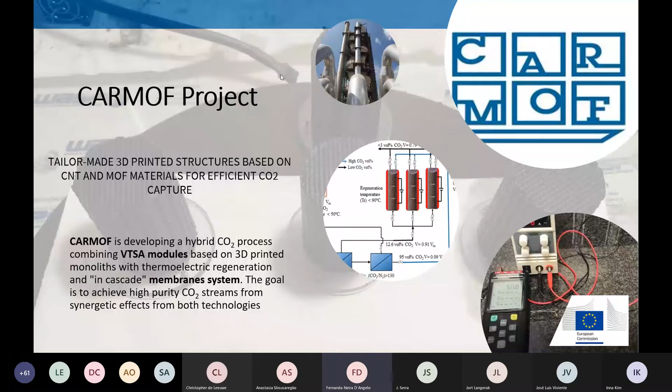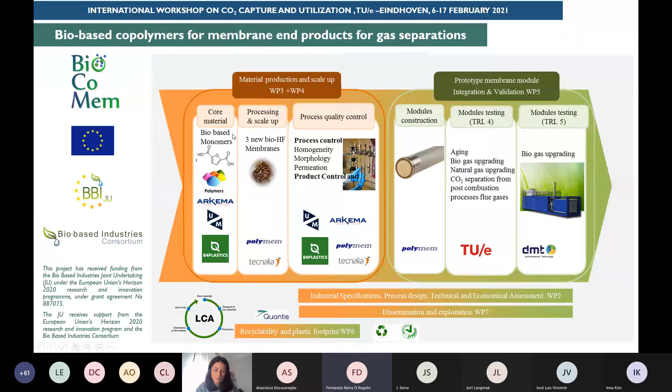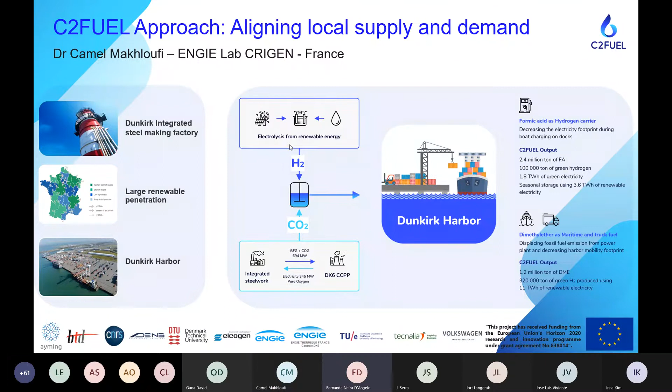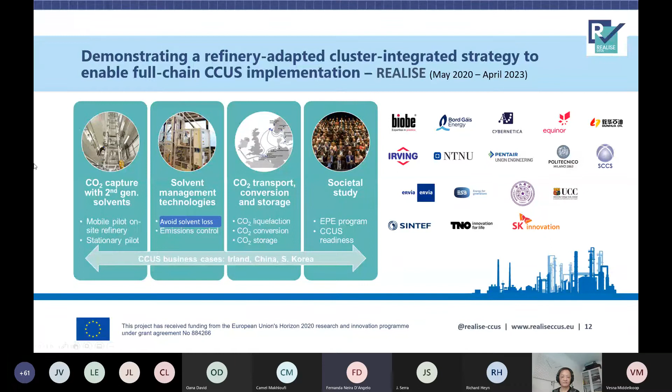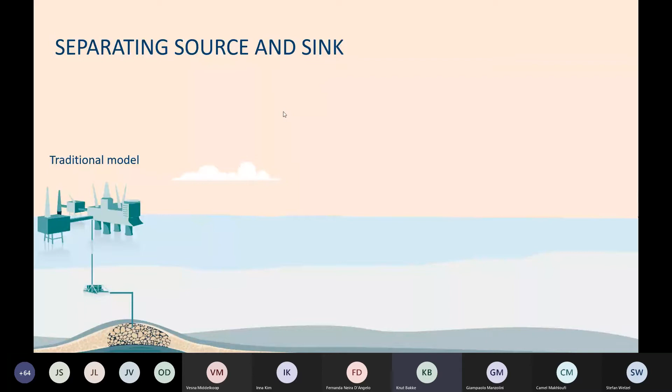So what we aim to do is to take the complexity away from the industrial sources by offering a service of collecting CO2, transporting it, and storing it in an underground reservoir for permanent storage. So the idea behind this is that oil and energy companies are competent and familiar with geology and the offshore work, while the industrial emitters can then focus on running their industry and learning how to capture CO2 from their particular industries.

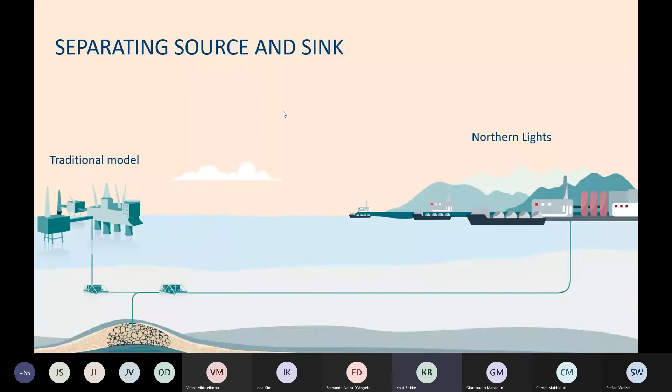So we are part of something that was named by the Norwegian government as a longship, which is a direct translation from the ships that were used by the old Vikings when they traveled around Europe. So it's intended to be a start point for an industry where we have a value chain with CO2 capture. We had in the initial stages two industrial emitters, one from a cement factory and one from a waste incineration facility in Oslo.

And we have a transport piece, which for us is in liquid pressurized form in ships. That has to do with the distance between the point source and the storage facility. So in the future, there may be other solutions with pipeline-based networks as well, and we don't really see that as a competition. We see all CCS as complementary at the moment.

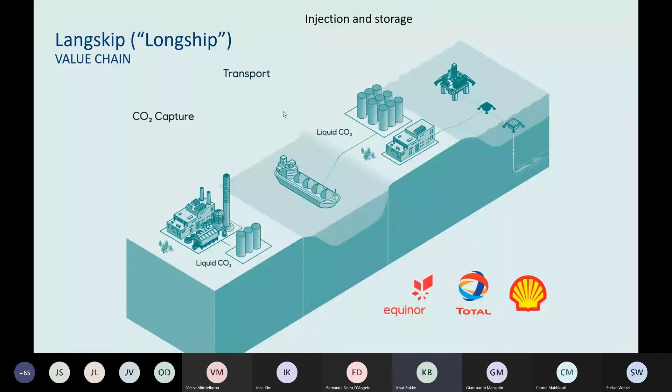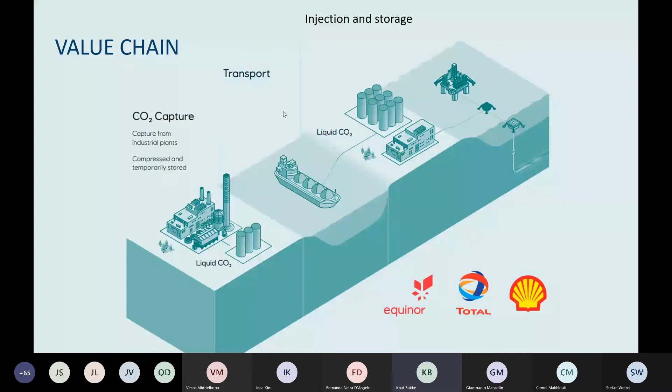So this is the concept where we basically capture CO2 from industrial plants. We compress and temporarily store the CO2 in tanks. Our process conditions are typically 15 bar, minus 26 degrees C. We transport it into a ship, and of course the Northern Lights scope of work is what's green on the screen now: ships, an onshore facility and offshore storage.

We take the CO2 compressed and transported by ship. We receive it at an onshore facility that will be located outside of Bergen on the west coast of Norway, where we receive and temporarily store the CO2 in the tanks that you see. We export it via an offshore pipeline and inject it in the reservoir some 2,500 meters below the seabed. And as you can see, the process is a batch operation when it comes to ship offloading. It's a continuous process when it comes to injection, and therefore the need for interim storage tanks.

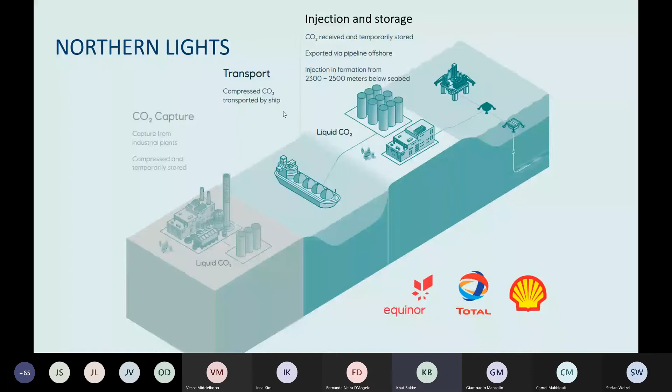The Longship project, as it stands today, has funded the Norcem facilities. And I can put up a pointer probably. Norcem facilities, it's a cement factory located here south of Oslo, which is up here. They will start up CO2 capture in 2024. There's also partial funding for the waste incinerator facility up in Oslo, but they need to attract additional funding. So the FID for this one is sort of on hold until they can attract funding.

Then we transport CO2 along a shipping route using purpose-built vessels. I'll get back to that. To the onshore facility here west of Bergen, an onshore facility being established, export into the offshore and injection to a subsea facility. So currently we're building a facility scope with capacity for 1.5 million tons per annum. We have two ships on order, and the volume from Norcem alone is 400,000 tons per annum. So by deduction, you can see that we're looking for more customers. More on that later.

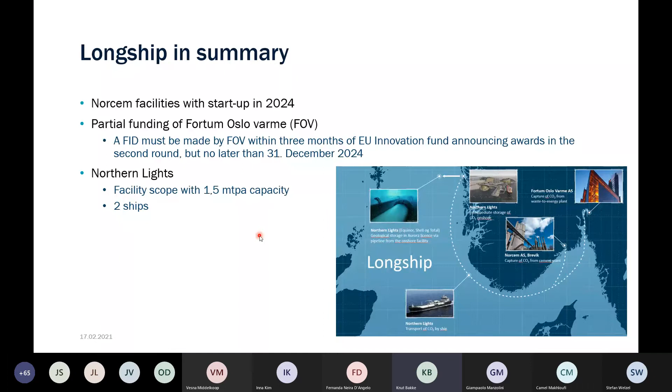The CO2 capture at the Norcem facility is illustrated here. They aim to collect 400,000 tons per year, which is about 50% of their CO2 emission. The reason they're not capturing all is one of heat surplus. 50% can be captured using surplus heat in the process. So that's what they're aiming for.

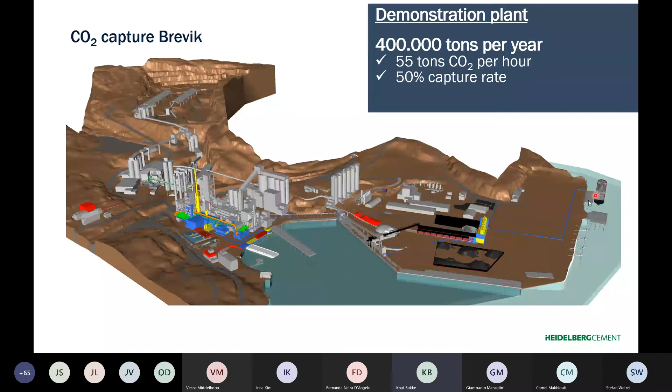What you're looking at here, all the gray stuff is the existing cement factory. All the colored stuff is new scope, with the capture facility here, delivered by Aker Carbon Capture. The blue are new buildings, and the CO2 will be captured and exported through to the storage tanks here, and finally offloaded at a commercial harbor called Grenlandhavn, where our ships will arrive and collect CO2 in the operations phase.

So what is Northern Lights? I'll get into a bit more detail about what we are doing. First and foremost, we're looking at CO2 transport by ship. That is an existing trade today, with food grade CO2 being exported by ships to breweries and greenhouses, etc., around Europe. One of the sources is the fertilizer factory owned and operated by Yara, not too far from Norcem. And that's sort of the starting point for our transport conditions. They typically transport in these conditions on smaller ships. So our step out is the size of the shipping.

And we have basically taken a relatively standard LPG ship that we are familiar with in the oil and gas industry. The idea of using a standard ship is to not pay a lot of money for developing something brand new, but rather take off-the-shelf designs and modify. So we have a proven concept based on this food industry model. We basically developed the storage tanks in the ships, and we aim to copy-paste, buying more ships. Potentially we're going to make them a little bit bigger. It depends on the future market for transport and storage.

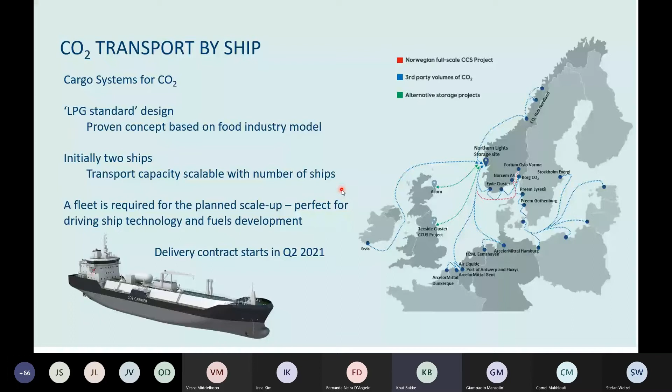The CO2 will then be loaded through pipeline into these storage tanks, and there will be a gas return in the system. So when we move CO2 here, the vapor space on top of these tanks will be moved back into the ship. So there's essentially a zero emission concept.

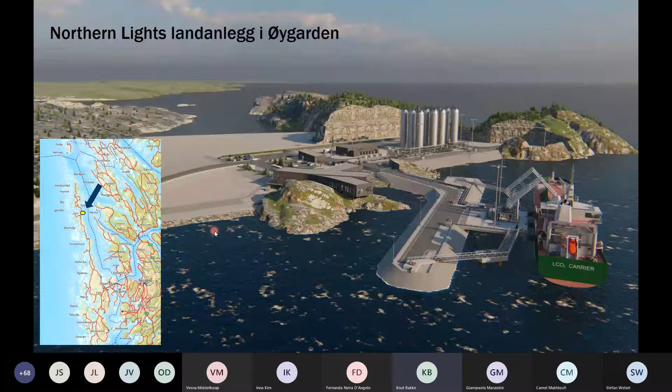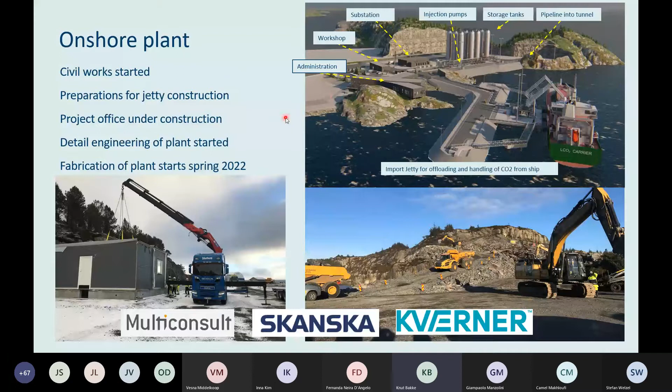Pipeline and subsea facilities, we already installed this template that you're looking at here in 2019 when we drilled our confirmation well. You see a picture here of this yellow bit at the sea bottom with the fish and our name on it. We drilled a confirmation well in 2020 before we took final investment decision in order to prove up the storage concept in this area. I'll get back to that.

We have started fabrication of a control umbilical, power, fiber optics. We are starting with engineering and modification at what's called Oseberg, which is an oil and gas facility near to our injection well. We have decided to pull the controls back to that platform in order to save money on the umbilical and control cable cost. We have started to design the pipelay, and again, a few of our contractors you can see here.

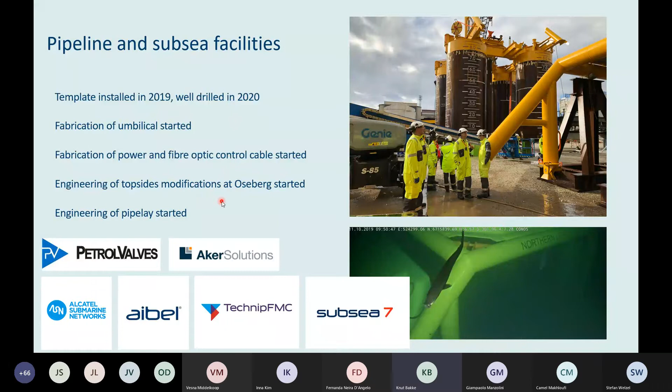Here is a rather busy illustration. It's intended to show you the location of the onshore with the pipe route going out here into the area where this well that I just talked about, it's called EOS, is located here. The offshore installation for control cable is located here. And we also are planning a contingent well in this area.

All these lines are trawling patterns from bottom trawling activity in 2018, and it shows that it's a fairly busy area. So one of our very important parts of design and installation is obviously not to conflict with fisheries. That means we need to have over-trawlable facilities, and we need to coexist with the fishing industry rather than fighting them, which is something that we obviously have been doing for a long time in the oil and gas industry.

For illustration, up here is the Troll gas field operated by Equinor with the pipelines back to Mongstad and the Kollsnes gas facility here. The Troll is both an oil and gas producer.

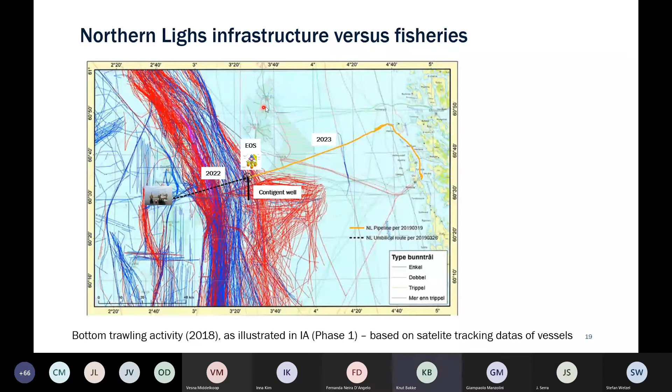Now to the storage concept. So I've tried to illustrate it. I'm not a subsurface skilled person, so this is a layman's description of the scope. But what you're looking at here is the well that we already drilled, which we will get back to later and complete for injection. And the purple part here is the expected extent of the CO2 modeled with an assumption of a certain volume injected that we have committed to in what we call phase one of this project.

And we are injecting into what we call a sloping aquifer. So these are sandstone formations with water, not to be confused with oil and gas structures. This is one without oil and gas in it, and it's only used for storage, meaning we are not looking for EOR opportunities or things of a similar nature. This is purely for addressing the climate issue.

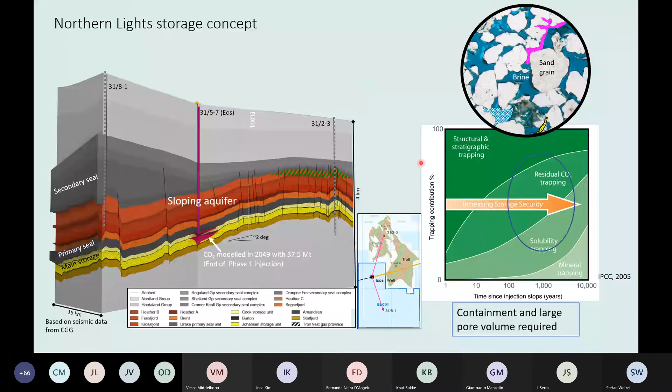So I'm going to talk a little bit about the storage experience. So this is industrial experience from Norway, meaning we are not doing this for the first time. Equinor has injected from Sleipner since 1996 and from Snøhvit from 2008. Both of those are gas-producing fields with excess CO2 that, driven by this local CO2 tax in Norway, have been commercial CCS projects in their own right. And we've stored nearly 20 million in Sleipner.

We have a publicly available data set for the storage, so we're trying to be very transparent on the storage bit there. Snøhvit has injected a bit less, but more recent, and that's a subsea facility which is similar to what we have in terms of the injection technology and the wells used up there. So it's not something new, and of course Shell and Total have experience as well, with Shell's most dominant project at the moment being the onshore Quest project in Canada.

Also partnered with Gorgon, with Chevron, on the Gorgon LNG facility in Australia. So there's quite a bit of industrial experience gained already.

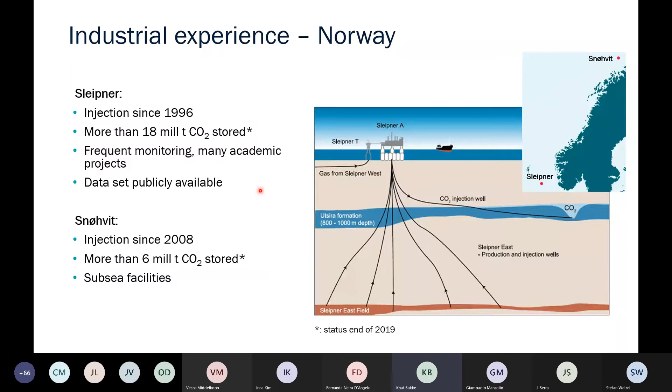One of the more important questions we're asked is how do we know the CO2 stays in the ground? We do that through a number of measures, the most important being seismic monitoring. The example here shows before and after seismic footprints from Sleipner, and the image on the right is the subtraction of one from the other, showing the extent of the CO2 plume.

So this is one of a number of monitoring technologies we use to ensure that storage is safe and under control. That's a bit of the technology.

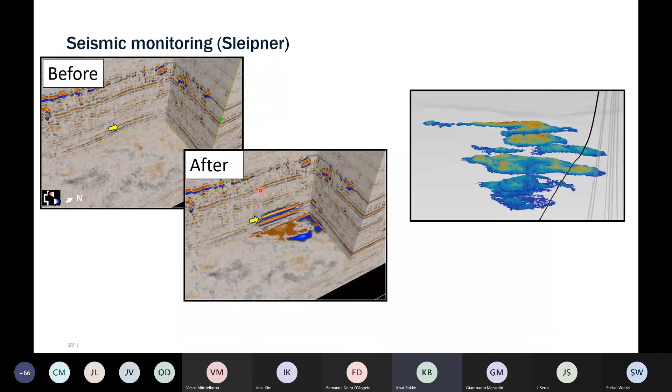I'll end with a few other, less technical issues. One, of course, very important for a commercial company like Equinor, Shell and Total, is whether there's a business opportunity. We're not a charity, so in order to make it sustainable, it needs to be seen as a future business.

What you're looking at here is a mapping we've done in Europe. We've developed a tool to map industrial sources - about 350 industrial sites in Europe, each larger than 100,000 tons per annum. Many of them are obviously a lot more.

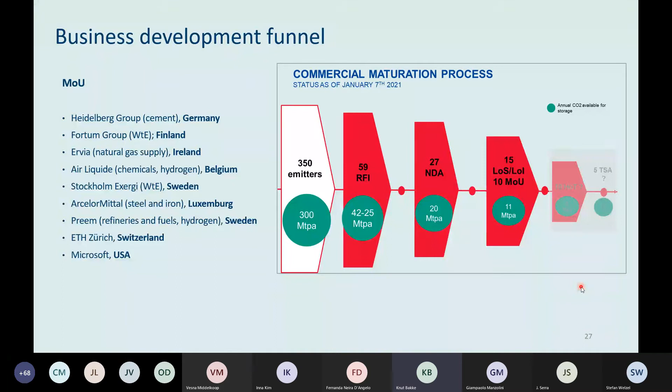So there are obviously some challenges related to building an industry, and we started out as conventional oil and gas project executioners, where in the normal concept we have a known resource, a regulatory framework that exists, and a business case stating there is value in selling these products, and an existing and predictable market. Typically when we develop projects, we go through a project maturation funnel, starting with business identification, going through early phases of project maturation. We have an investment decision, we go through execution and then operation. We invest in this phase, and we recover in the operations phase. And we typically have a relatively mature technical funnel. We have known or at least predictable risks. We freeze our concepts and typically are not schedule driven, at least in planning of these normal oil and gas projects.

When it comes to Northern Lights, it's much more interesting. Obviously we have an unknown resource. We have this storage reservoir that we've identified, but we don't really know how much it can take, because we don't have the luxury of drilling a lot of very expensive appraisal wells. So there's a bit of, let's say, gambling in the total storage volume that we can expect in that area. We expect it to be several hundred million tons, but we have to be careful as prudent operators. So we've committed to 40 million tons total storage. And then when we get started with injection, we obviously expect to prove much more. But the whole resource validation is harder than we do in normal projects.

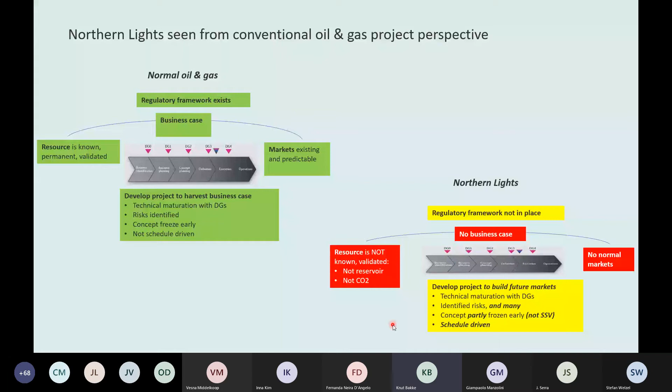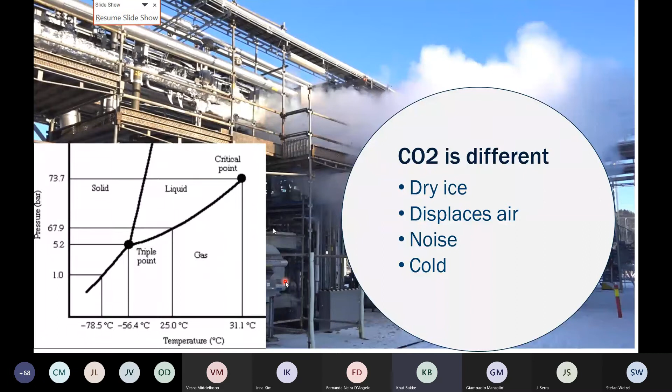These are important things, and most of you, I guess, are familiar with the phase curve for CO2, where we typically operate in the liquid and supercritical area, but for maintenance and planned events we need to go through to atmospheric pressure, which passes through the triple point - an interesting challenge for technologists. We've obviously developed a philosophy for this. We have no conventional flare system, for instance, which is something we're used to on petrochemical plants. There's no need for it, and we can't have it, because of the dry ice formation. So there are a few special nuggets for designing CO2 plants.

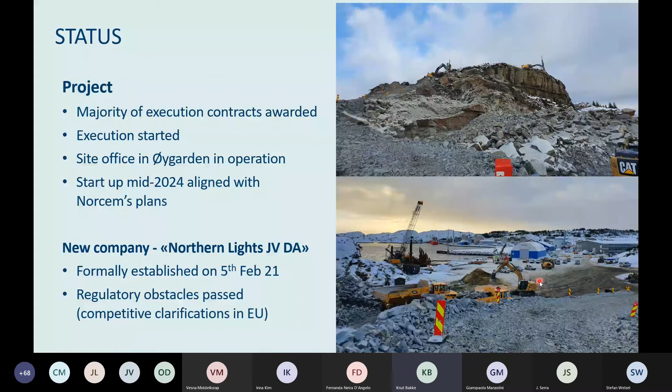So that concludes what I plan to say. If there are any questions or discussion points, we can take that.